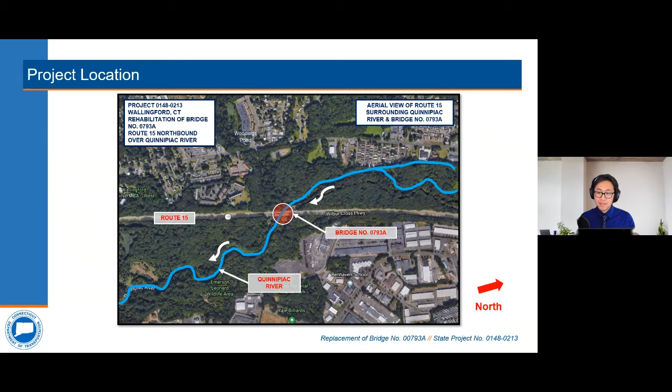Here's a closer view of the project site. East of Bridge 793A, there is an existing pedestrian bridge that crosses the Quinnipiac River and carries the Quinnipiac River Linear Trail. 150 feet north of Bridge 793A, the trail is carried under Route 15 by a concrete culvert tunnel. The Quinnipiac River Linear Trail will remain open to pedestrians throughout the duration of the proposed project.

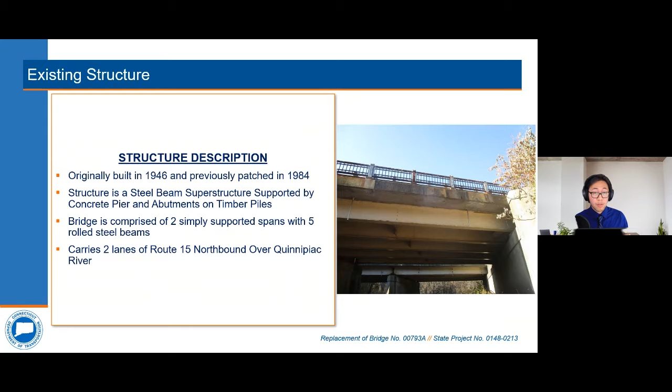Bridge 793A was originally constructed in 1946. The bridge underwent a rehabilitation in 1984. The bridge is comprised of 2 simply supported spans with 5 rolled steel beams and carries 2 lanes of Route 15 northbound traffic over the Quinnipiac River.

As mentioned previously, Bridge 793A carries 2 lanes of traffic with an average daily traffic of 29,600 vehicles per day. The overall structure length is 107 feet, with each span length being 51 feet.

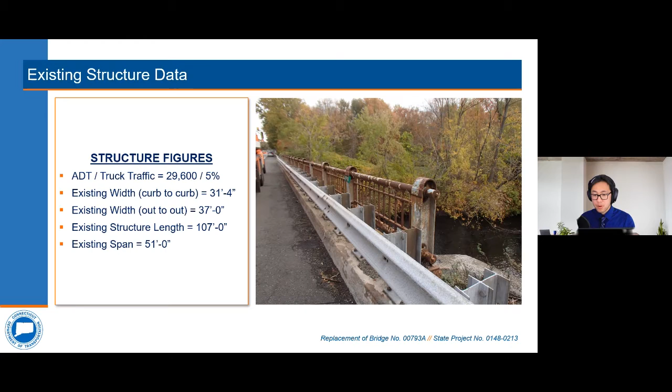Now, we'll be explaining components of a bridge along with bridge language that will be used throughout the presentation. So, ladies and gentlemen, we are finally ready to present our technical portion of the presentation, and you will be hearing a lot of bridge lingo throughout the presentation. Therefore, I am about to give you a 2-minute crash course on some of the structural elements on a bridge and the numerical condition rating system assigned on a bridge.

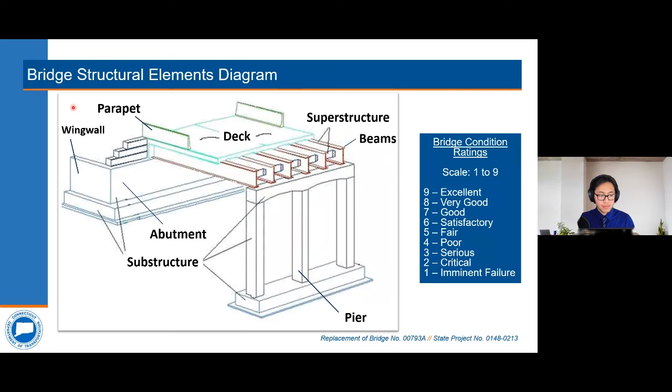On the diagram shown, the deck is the riding surface of the bridge. The parapets, or sometimes bridges can also have an open rail system, help prevent errant vehicles from going off the bridge. The beams, or the girders, are the supporting structural elements on the bridge and are designed to support vehicular loads, the self-weight of the bridge, and any environmental loads such as wind, seismic, etc. The parapets, the deck, and the beams or the girders are what makes up the superstructure of a bridge.

The abutments and wing walls are the end supports on a bridge, and the piers, if there are any, are the intermediate supports. Together, the abutments, wing walls, and piers make up what is known as the substructure of a bridge. The substructure not only supports the superstructure, but also helps in transmitting loads from the superstructure down to the bridge foundations.

All state bridges and town bridges over 20 feet in length are inspected every 2 years by the department's Bridge Safety and Evaluation Unit and are assigned a condition rating on the major structural elements on a scale of 1 through 9, with 9 being excellent condition and 1 being imminent failure condition.

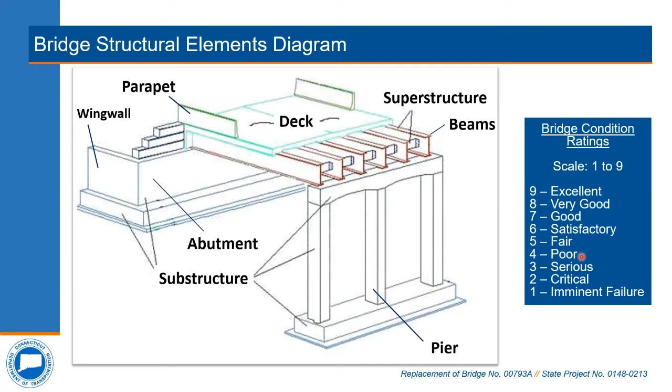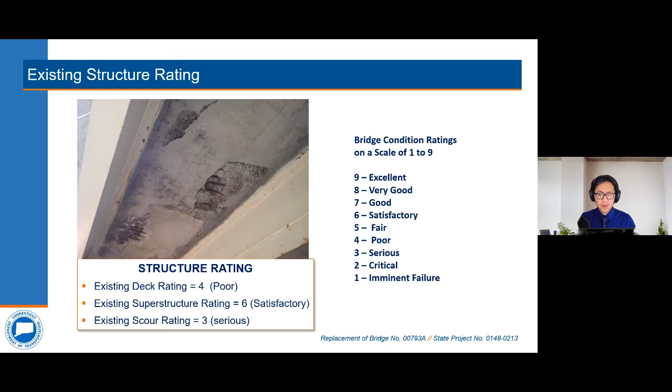This project was programmed for rehabilitation due to the condition of the deck. The purpose of the project is to address all the structural deficiencies of the deck. In October 2020, inspection of the bridge found the deck to be in poor condition, rated a 4. The existing superstructure is satisfactory, rated a 6. Erosion of the riverbed, or scour, at the bridge's foundation is in serious condition.

The purpose of the project is to address all structural deficiencies of the deck, as mentioned in the previous slide. Our objective in meeting that purpose is to effectively use the program's state and federal funding to address the deficiencies, while minimizing the duration of the project and limiting any impacts to travelers along Route 15 and users of the Quinnipiac River Linear Trail.

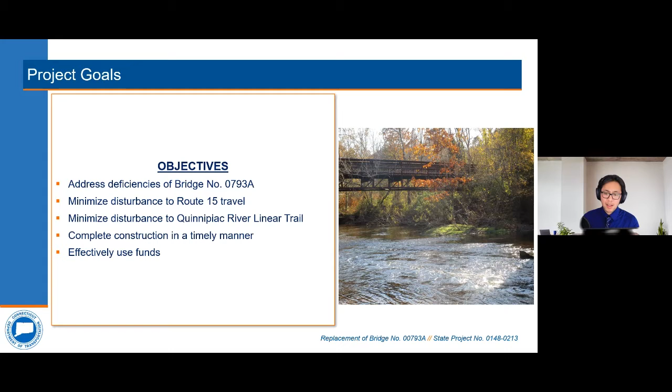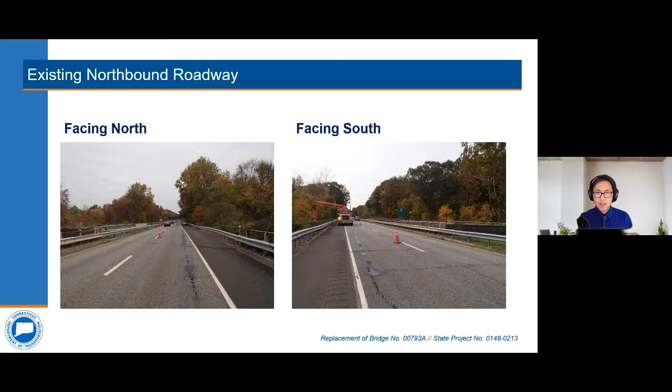We'll be going over some general deterioration around the site. Multiple bituminous overlay cracks on the deck surface can be spotted in the two photos shown. On the right, asphalt sealers that have been used in the past to address overlay cracks are also experiencing similar cracking.

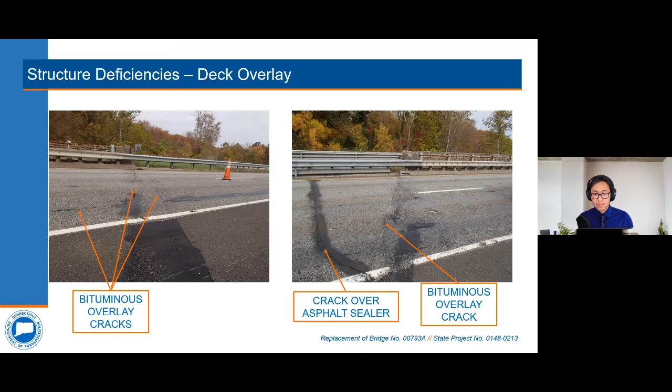These three images of the deck underside show examples of exposed and deteriorated steel reinforcement, concrete pop-outs or spalls, and patching from the 1984 rehabilitation project.

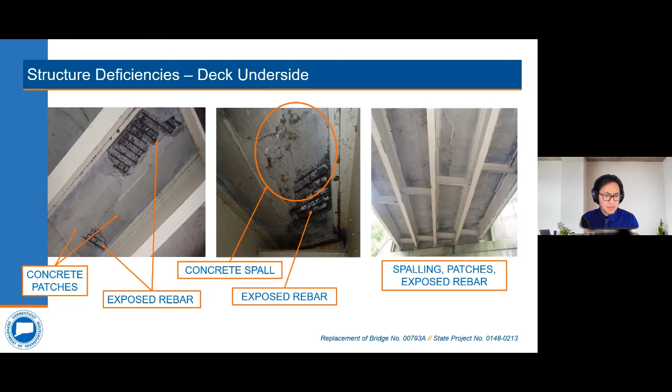The steel load-carrying beams of this bridge are experiencing extensive rust, which has resulted in a corresponding loss of steel material in some locations of the beams.

The left image of the south abutment shows examples of concrete deterioration. Similar deterioration is present at the north abutment. The right image shows examples of concrete deterioration at the pier.

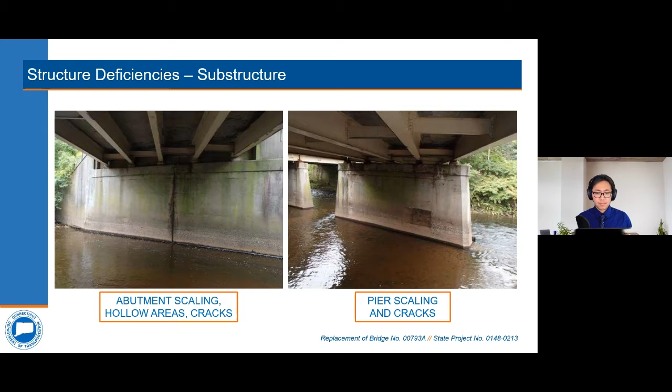During the first construction season, in-stream and substructure work will be performed to address scour and substructure concerns. Both the in-stream work and substructure work are split into 2 stages. On this slide is the overview for the first stage.

Stage 1 will consist of installing sheeting and cofferdam into the southern riverbed to dewater the construction area. After dewatering, the existing southern stream bed will be excavated so that the riprap can be installed. The riprap will then be top dressed with stream bed material. While the area is dewatered, repairs and minor modifications to the substructure will take place.

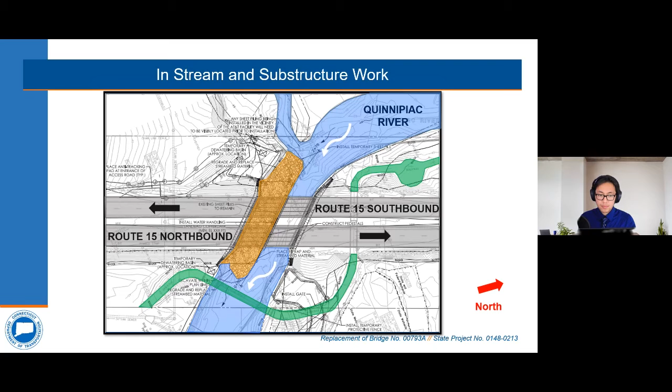Flow to the southern riverbed is to resume once stage 1 is completed. Sheeting and cofferdams will then be installed into the northern riverbed to dewater, install riprap, and address substructure work, similar to stage 1. Full river flow will be restored upon completion of this stage. No in-stream work will be done during the fish migratory period of April 1st to June 30th.

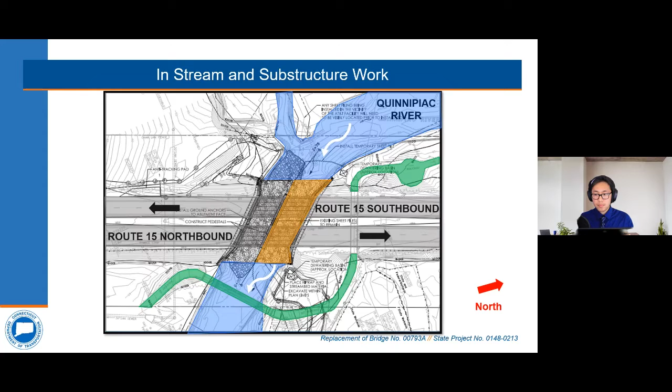Throughout the project, 2 lanes of traffic will be maintained during the weekday peak commuting hours of the morning and evening. Outside of those periods, the contractor may be permitted to close a lane or shoulder to perform work. Additionally, 4 weekend periods are required for the demolition of the existing concrete deck and beam superstructure and the subsequent replacement of the superstructure with prefabricated bridge units, or PBUs.

During the noted weekend work on the superstructure, traffic will not be present on Bridge 793A through the use of a crossover, as detailed on the following slide.

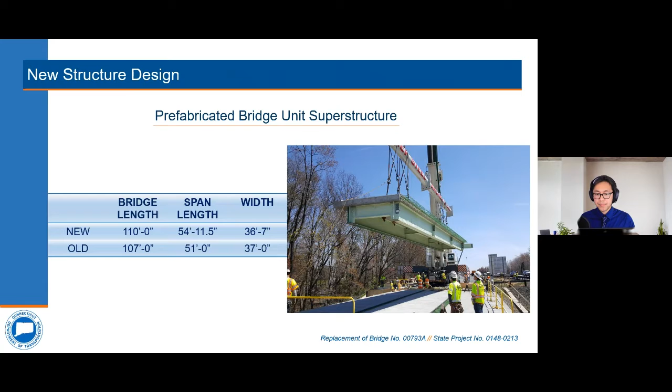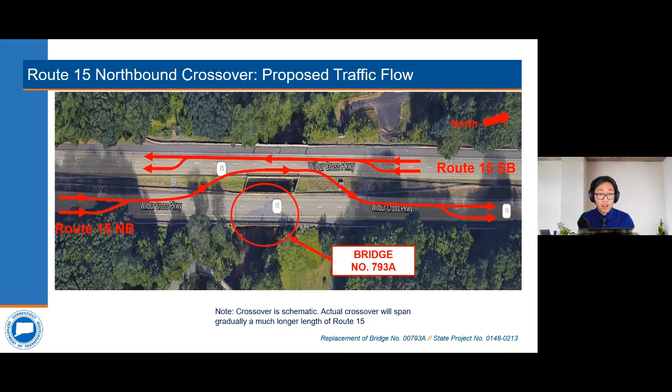Prior to installing the crossover, as mentioned in the previous slide, the contractor will remove the existing pavement from the bridge down to the surface of the concrete deck. This will facilitate the demolition. The contractor will then install the crossover and use a crane to remove the first span of the bridge and install the prefabricated bridge units.

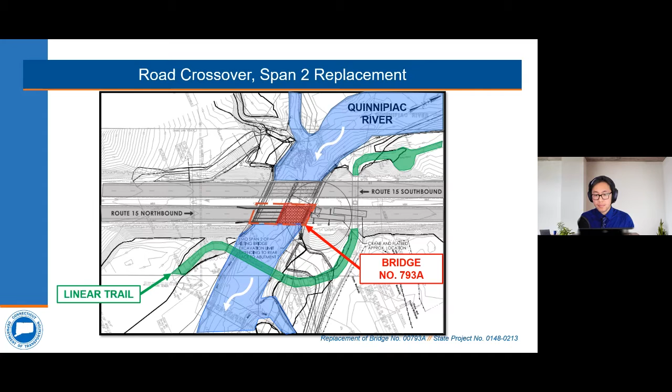On a following weekend, the contractor will repeat the process for installation of span 2. The remaining 2 weekends will be used to complete the superstructure work. This includes construction of the concrete closure pours, which connect the prefabricated bridge units together, installation of waterproofing membrane, and final paving. Final line striping and installation of the open bridge rail might also occur during the weekends, but could occur during weeknights or from behind temporary concrete barrier.

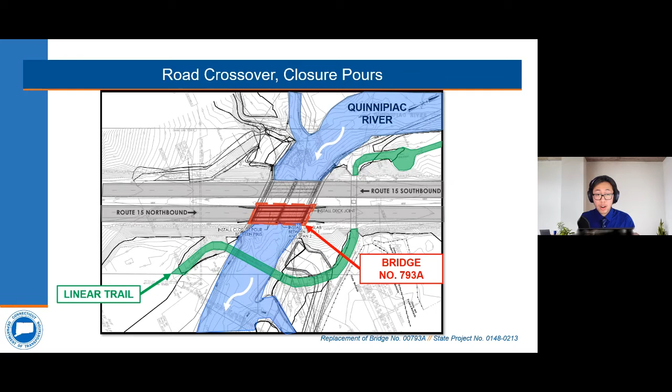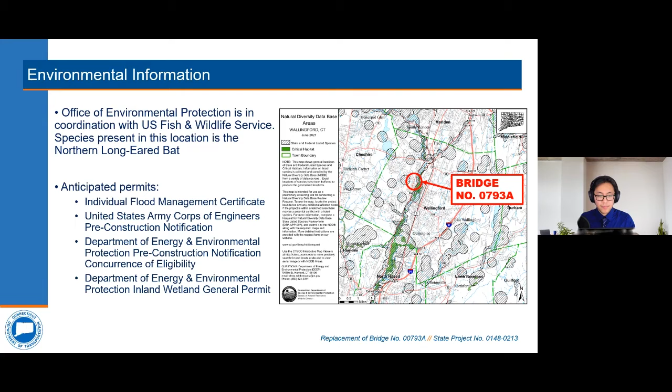Based on the Natural Diversity Database Map, or NDDB, the project location is listed as a critical habitat with state and federal listed species. Species present in this location is the northern long-eared bat. The permits listed on this slide are those anticipated from the Department of Energy and Environmental Protection and the Army Corps of Engineers.

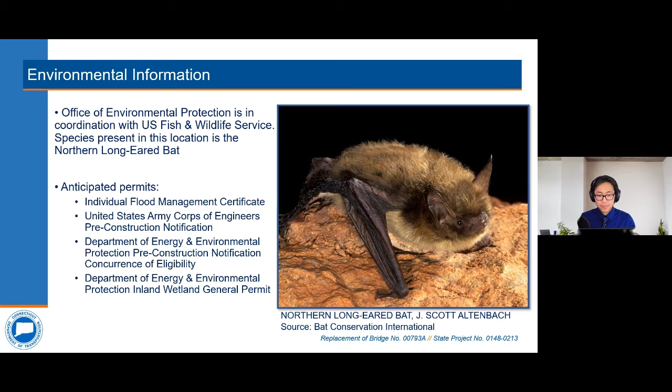The department plans to construct the northeast access road using an existing dirt road in place from a lot owned by Wallingford Group LLC, through town of Wallingford property, and onto the project site. The only time construction activities will affect the pedestrians is when the construction vehicles need to cross the trail to enter the project site from the access road. For protection of the public, construction fencing will be in place at the project site so that the pedestrian trail will remain active throughout construction.

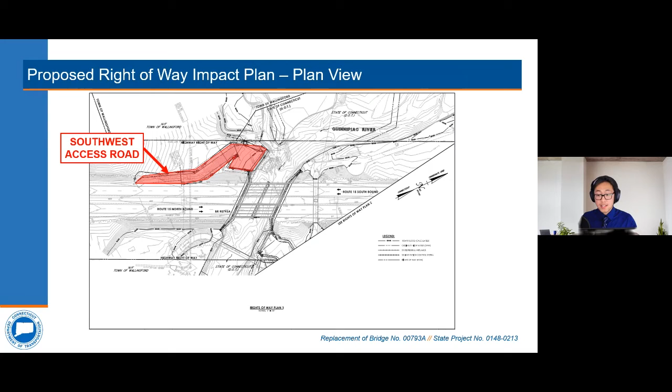Here we have the right-of-way impact plan. On this first detail, there are no impacts to private right-of-way because the project area shown is located entirely within highway right-of-way. At the top of the slide, the southwest access road is shown falling entirely within state of Connecticut right-of-way. A second access road at the northeast embankment will also be necessary. A small portion of this access road is shown in this detail.

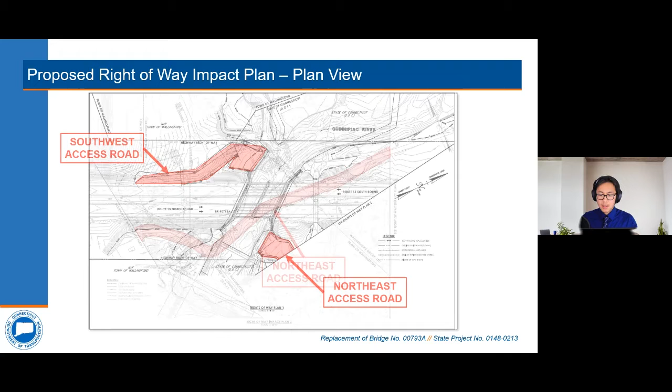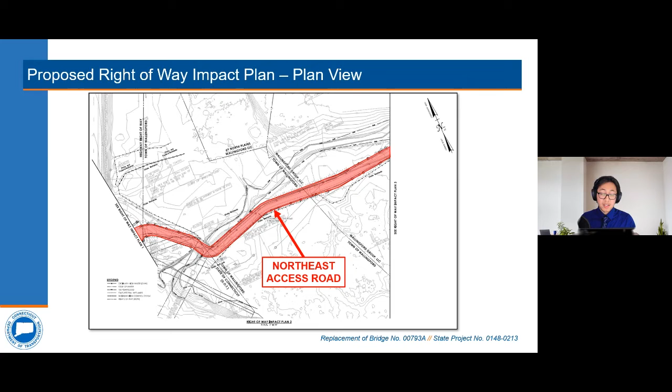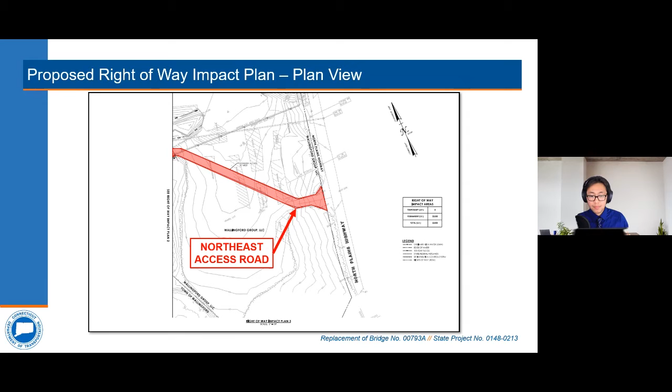My name is Matt Giannakopoulos, and I am a project coordinator with the department's Division of Rights-of-Way. It is our office's responsibility to acquire the property rights needed for transportation projects. The proposed project design requires the acquisition of property rights, so I'd like to give a brief overview of the department's right-of-way acquisition process. Please keep in mind, though, that the specific impacts are still being fine-tuned and may change as the design progresses.

Any property rights that will be required will be acquired in accordance with Connecticut General Statutes, Sections 13A-73 and 13A-98E. And whenever there is federal money used in any aspect of a project, the department must adhere to the Uniform Relocation Assistance and Real Property Acquisition Policies Act of 1970, as amended.

Once the design has moved to the point where we are ready to begin the acquisition process, each affected property owner will receive a formal letter of intent to acquire from our office, along with a property map which depicts the exact property rights to be acquired.

At that point, our office will determine the fair market value of those property rights and use that value to establish an offer of just compensation. That offer will be sent out to the property owner in writing, and a right-of-way agent will be available to meet with the property owner and explain the project, go over the specific impacts to their property, and explain the state's offer.

The property owner will have a reasonable time, typically at least 30 days, to consider the state's offer and enter into negotiations. If an agreement is reached, the state will prepare all the necessary paperwork and record the deed and the property map on the town land records.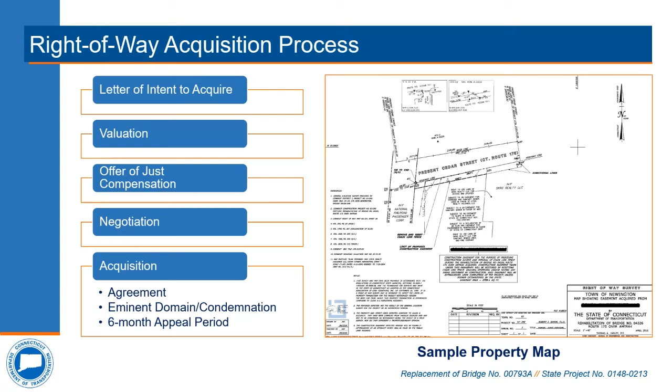If there are any questions regarding the department's right-of-way acquisition process, I'd be happy to address them once the presentation has concluded.

Construction for this project is expected to start in April of 2024. The estimated cost of the project is $6.5 million, using 80% federal funds and 20% state funds. No local funds will be required for this project.

Duration of construction is projected to take 2 seasons. The first season consists of installation of scour countermeasures because of the in-stream work restrictions between April 1st and June 30th. Due to the in-stream work restrictions, it is anticipated that this work will take a full construction season to complete. During the first construction season, the contractor will have lead time for procurement and fabrication of the PBUs.

The second season will consist of the stage construction of the bridge over the span of approximately 4 weekends.

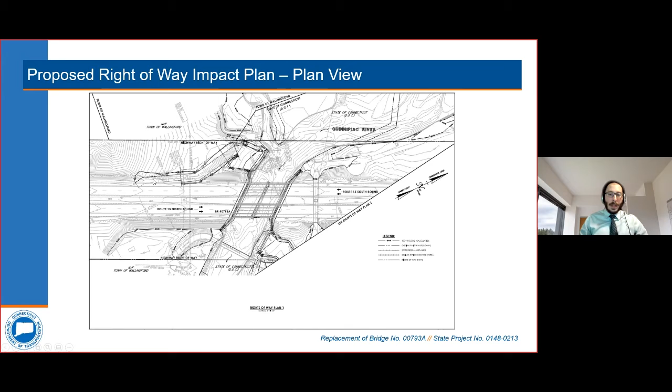When construction vehicles are crossing, flaggers will be in place to make sure that the users of the trail are safe when vehicles are operating in proximity to the trail. The area between the trail and the river will be fenced off so that the public trail users don't inadvertently enter the active construction site, which could be quite dangerous. A gate will be placed in this fence that allows construction vehicles and construction personnel to access the work area upon crossing the trail from the access road.

So there will probably only be a momentary delay in pedestrians' use of that trail. The flaggers will help to ensure their safety as well when construction equipment and personnel is in proximity of the trail. Thank you, Nick.

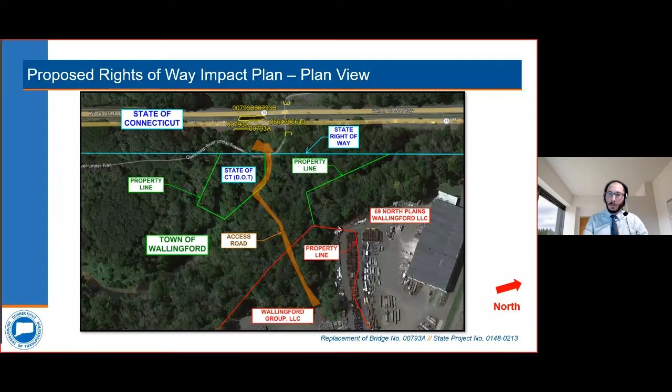Nick, we've got another email question. What will the access roads be used for? And it looks like we've got an answer already prepared, if you want to speak to that.

Yeah. So there's two access roads, one at the southwest embankment and one at the northeast embankment. Both are primarily for the in-stream work. We need access to the underside of the bridge to be able to drive the sheeting, to remove the existing channel bottom, to place riprap, and to do the minor abutment repairs.

As we stage that construction underneath, if you recall, we had to drive sheeting at one side to dewater one side of one barrel, meaning one span of the bridge, and then we would transfer to the other side. Since we're doing work from both sides of the riverbed, we would need access to both sides of the river, hence the two access roads at the southwest and the northeast.

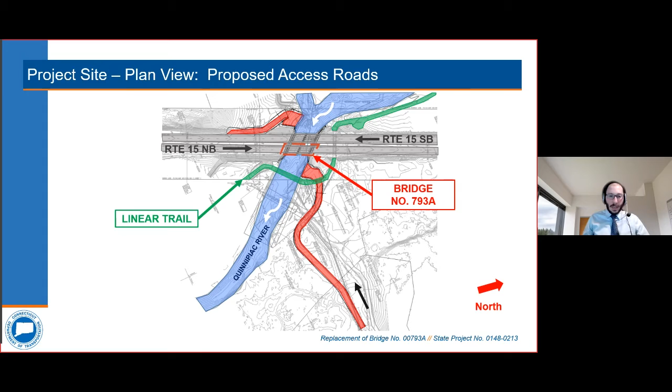The access roads will be used for hauling material, so dump trucks, excavators. The work to do the PBUs is primarily going to be performed from the top side with crane equipment and other large equipment, so we won't need flatbeds or cranes accessing these roads. It'll primarily be excavation equipment, pumps for dewatering the work area, slight staging for the sheet piling before it's driven, and hauling the equipment away as it's excavated and hauling the riprap in before it's placed.

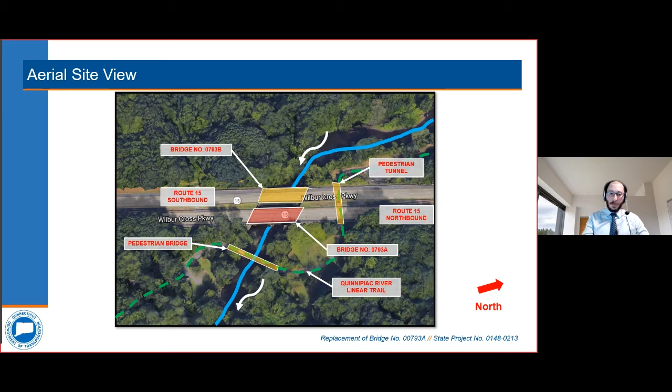Thanks, Nick. No problem.